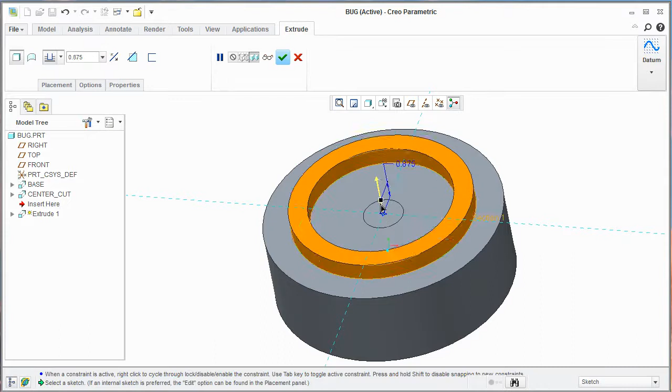This is true even if we push it through and make it a cut. So let's go ahead and commit to that. As you can see, I can actually pick right through there, so there's actually not a surface there of any kind, but it just appears to be covered, where the other side is not. That's not true.

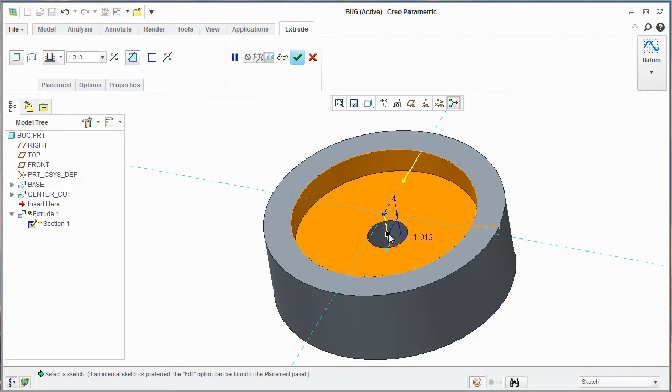If you edit this and change your sketch to a single profile, then it has no problem. But again, as soon as you add that second profile, it covers that center hole. This is true no matter how you create this. You can create this using a projected curve, a sketch of two closed profiles, project the curve onto here, and then using a surface cut.

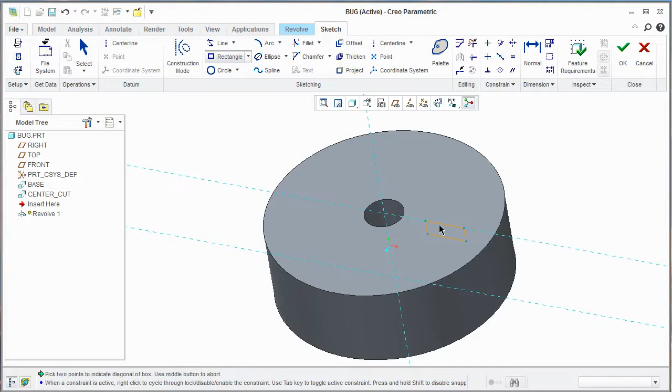In fact, the one that I found really weird is if you create a revolve feature. So we're going to sketch on here, and I'm going to sketch a rectangle. I'm going to hold Alt on the keyboard and select this surface as a reference. Even if I sketch this, which technically is creating the same effect where you have basically two closed profiles, but you're using a completely different approach, the problem is still evident.

So let's turn on our axes and choose my axis for rotation, let's make it a cut. As you can see, it still covers that. It seems like anything that has a profile enclosed with another profile causes this weird effect.

In fact, we even tried this as an assembly cut, and it still covers that hole, or it appears to cover that hole. As you can see, I can pick right through it. So it's just like this weird effect that happens when you do this. If you insert yourself before that feature occurred, obviously there's no problem. But as soon as you have a dual profile situation, it reacts this way.

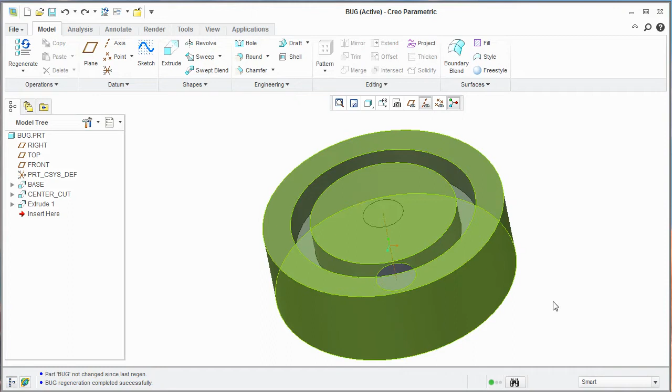So I just wanted to show that to some people. Right now I'm just undoing, so you can kind of see that it always happens whenever we have a dual profile type cut on the same surface, or in fact not even the same surface. I even created a default datum plane, offset it from the surface down, and created the same sketch on a datum plane and extruded it up, and it still caused this hole to get covered.

So I was playing around with this and thought it would be good to see if others are having the same experience I'm having with this, which I consider at this point a bug. So with that, if anybody can give some input on it, I'd appreciate it.